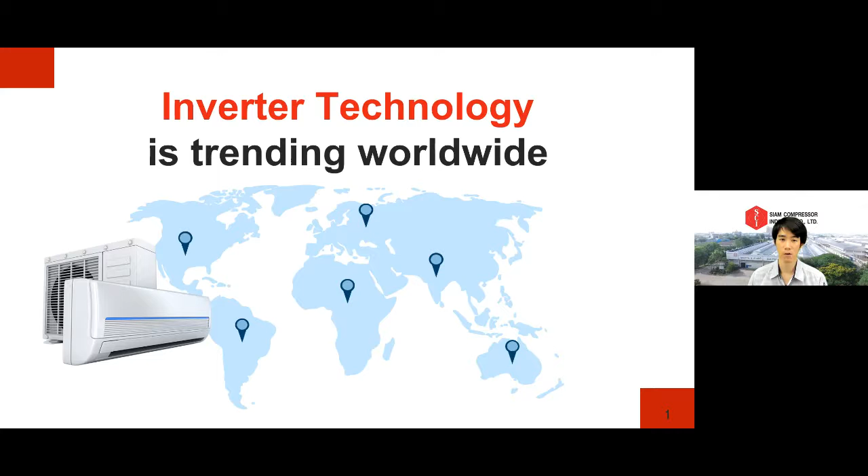So today I would like to share with you the benefit of Mitsubishi high pressure shell compressor that might be useful for your testing in the future. So let's start with this slide. Mitsubishi, we have supplied our compressor to many countries around the world, not only in Asia, but also in Europe and USA or Canada. There is a lot of interest in inverter technology because now inverter technology is trending worldwide. We have supplied our product not only in cooling application, but also in heating application and industrial application also. So I would like to say that Mitsubishi, we have a lot of experience in various types of product that could support you.

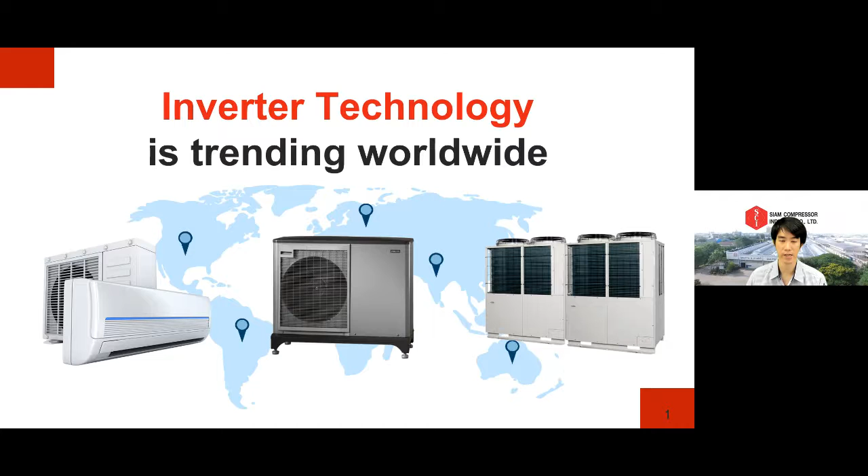I believe the main goal for the unit maker is to get the best efficiency and the best reliability for the customer. And in order to get better efficiency, I believe inverter technology is your answer nowadays because we all know well that inverter technology has a lot of benefits, like you could get better efficiency at part load condition and also less power consumption compared with the fixed speed solution. And in terms of better reliability, I would like to give you the benefit that you could get from using our high pressure shell compressor, that you could get better reliability for your system also.

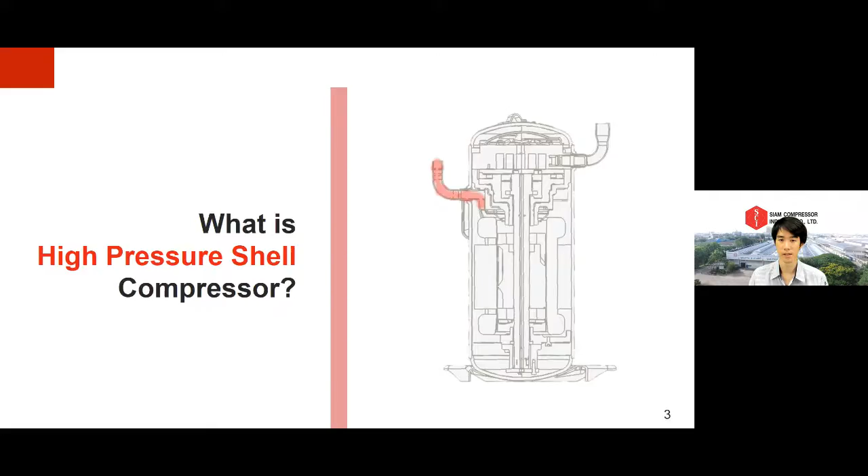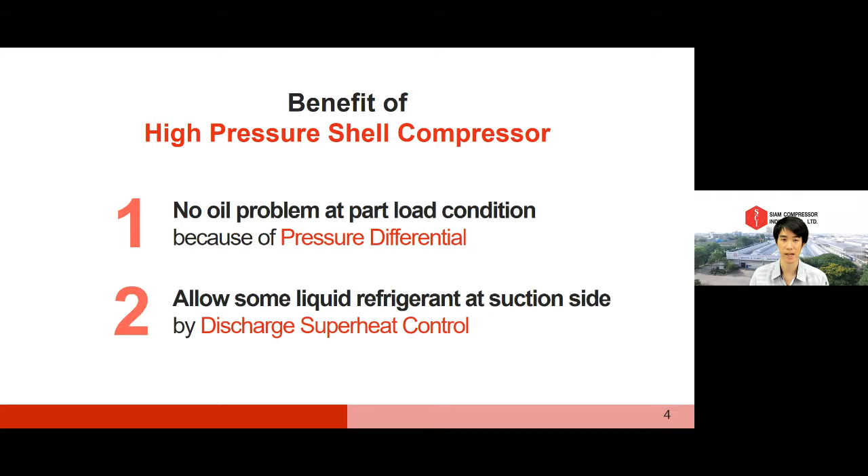So with this design, the pressure inside our compressor is very high. Also, the temperature is high also. And there are two main benefits that you could get from this design, a high pressure shell compressor. The first one is you could reduce the oil problem at part load condition because in our product, we use the pressure differential in order to supply oil for the internal part. And the second benefit is we could allow some liquid refrigerant that could go into the suction side by using discharge superheat control. So I will explain in the next slide the detail of these two benefits.

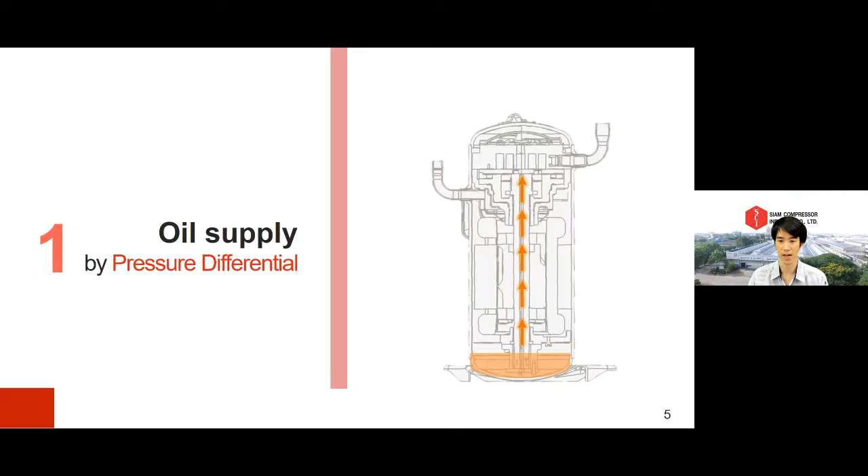Start with the first benefit, the oil supply by using pressure differential. So the concept is because at the top of the compressor and at the bottom of the compressor, there is a pressure difference. So we use this method in order to supply the oil from the bottom to the top of the compressor. Like this orange arrow in the presentation, it shows you the oil path from the bottom to the top of the compressor. And if you still worry about this concept, we also did many confirmation tests at severe conditions, for example, high load condition, high compression ratio condition, or high temperature condition, not only inside the operating envelope, but we also test outside the envelope to ensure that with our product, there will be no problem with the oil supply using the differential pressure concept.

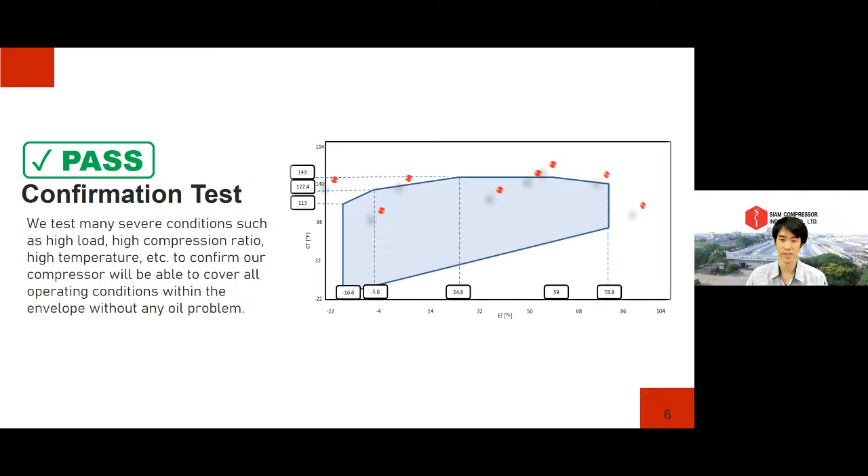And this slide shows you an example of how easy it is to use our compressor. Thanks to the benefit from pressure differential, our compressor doesn't have the oil pump inside the compressor. So we don't need to boost up the speed, which means you can play with the speed.

For example, this is one of our scroll compressors. There are two main areas, area 1 and area 2. For area number 2, which is the main area, you can play with the speed from 15 to 120, which is the maximum speed, without any restriction, just controlling the discharge temperature so it is not higher than our limitation.

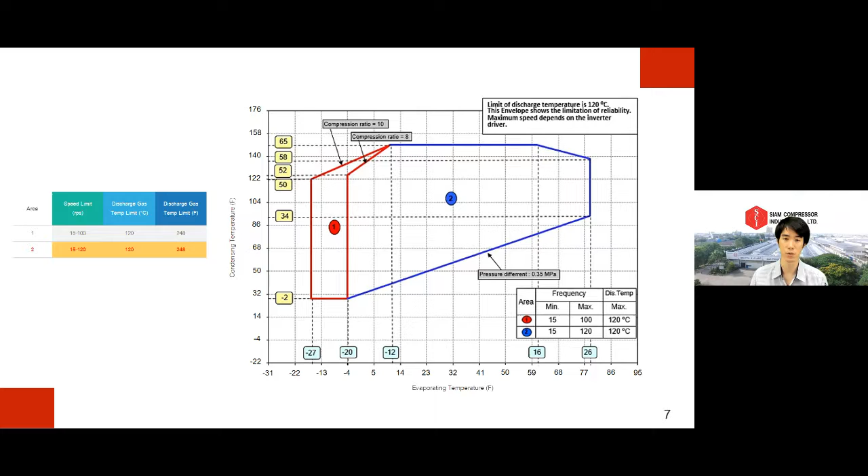For this model, the max discharge temperature limitation is 248 degrees Fahrenheit. So you just control this number, that's all. So it's very easy to use and easy to control our inverter scroll compressor.

Besides, our internal parts, like the compression chamber, have a special coating that can manage the liquid refrigerant also. So that is the benefit you receive by using our compressor. And with this concept we can use the benefit from liquid refrigerant, like oil return by the oil washing method. The main concept is we adjust the discharge superheat in order to get liquid refrigerant to bring the oil back in the liquid state.

And by using this method, there is no need to boost up the speed in order to return the oil, so there is no effect on the capacity of the unit and the efficiency of the unit, because we don't have to change the speed. That is the main benefit you get from the design of the high pressure shell compressor.

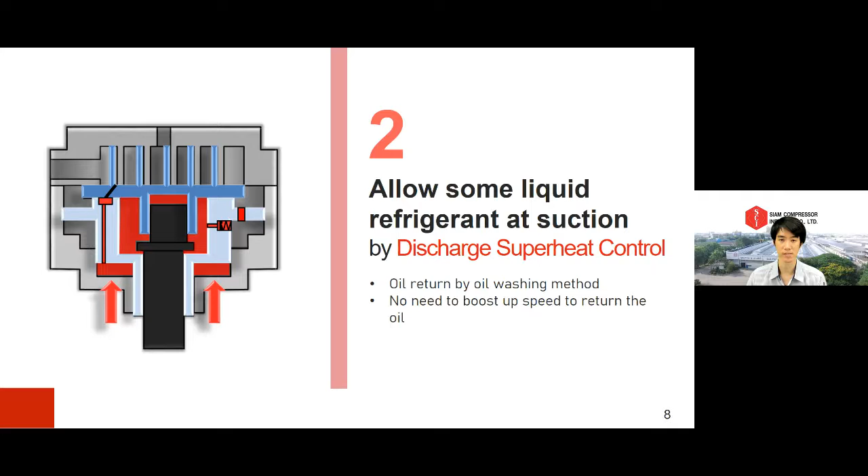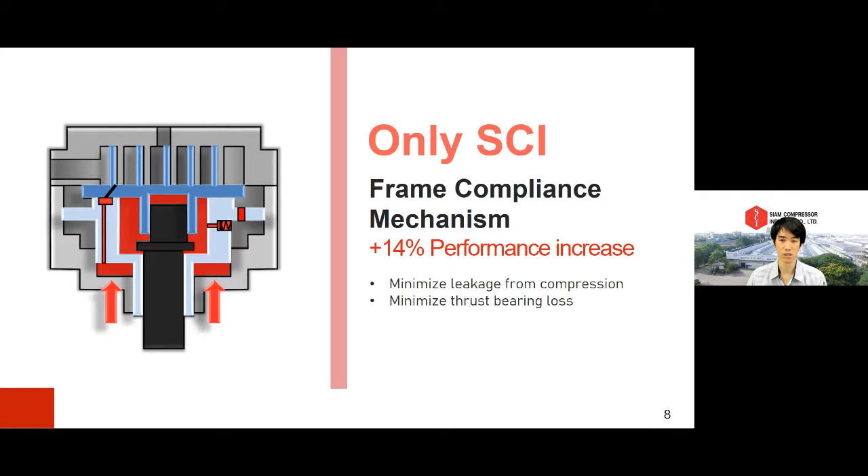And only available with Mitsubishi compressors, we have a frame compliance mechanism, which is Mitsubishi patented technology. From the actual test results, we could increase the performance by about 14% compared with the conventional design. With this technology we optimize the pressure chamber inside the compliance frame in order to minimize two losses. The first one is the leakage from compression, and the second one is the thrust bearing loss. That's why we could increase our performance a lot, about 14%. And we have put this technology in all of our scroll compressors.

We also did confirmation tests like liquid starting testing. This diagram shows you how we perform the test. We have a liquid refrigerant tank connected with a solenoid valve at the suction side of the compressor. We open the valve and allow the liquid to go to the suction side, and we do the test with our compressor. After that, we have a teardown analysis to check the internal parts.

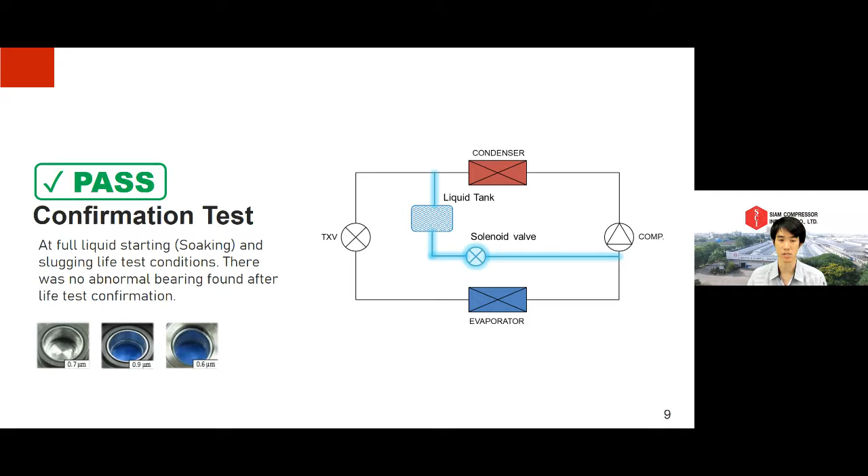You can see from the picture below that, in conclusion, there is no abnormal bearing part after the test confirmation. So we can ensure that this concept works well with the high pressure shell compressor. And not only the two main benefits you get from using the high pressure shell compressor, we have a lot of technology that we put in our scroll. This slide shows you in summary what we put in our scroll.

The first one is the asymmetric scroll design, which we designed to reduce the loss from compression leak and increase the stability of the refrigerant flow, in order to increase the efficiency of the unit in the system. The second point is low oil circulation. We have an oil separation technology that we put inside our compressor.

We also enlarged the oil tank so we could reduce the oil circulation ratio, about 50% at startup and about 10% at steady state compared with conventional models. The third one is the new suction structure you can see on this compressor. We put the suction side at the top of the compressor so that we could increase the performance at high speed operation through a larger suction volume.

The next is relief valve technology, with which we optimize the compressor performance and efficiency when operating in the over-compression area. We also have a high efficiency motor, specially designed for our scroll, and we're also using a rare earth magnet, which is a high grade magnet, in order to make sure that the reliability of our motor is very high.

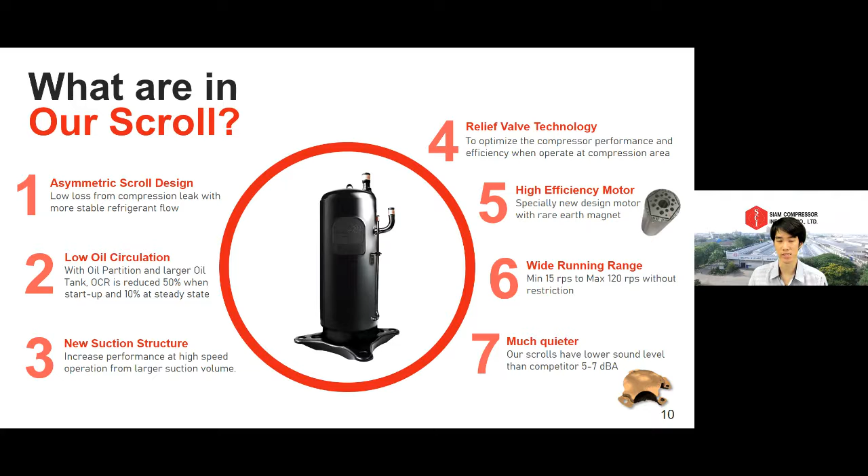And Mitsubishi, we never stop. This shows you our future plan. In the near future, we will have 3 new models that will increase the capacity of our lineup. We have 3 sizes: the first one is the ANB 100cc, BNK 110cc, and the last one is BNK 128cc. With the largest size, 128cc, you could go up to 23 tons in terms of capacity.

We have also put many new technologies in our new products, like vapor injection, a new internal structure, or very low speed operation, like 10 RPS, so customers can go lower than with our conventional model. It will also have high performance and low oil circulation.

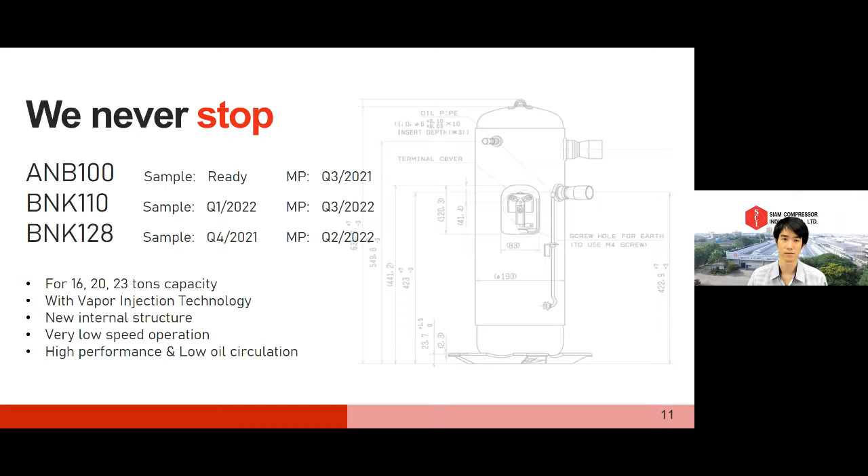And this slide shows you our total lineup, including our future products. The smallest size we have right now is 0.5 tons. This is the DNB 22cc, and the biggest size at this moment is the ANB 87cc, which can go up to 15 tons. But in the future, as I said, with the BNK 128cc, it could go up to 23 tons.

And if you want to use our compressor in tandem, we have an option to do a tandem configuration as well. For example, with 128cc, you could connect 4 units in one circuit, so you could reach about 94 tons in terms of capacity when our BNK 128 is available.

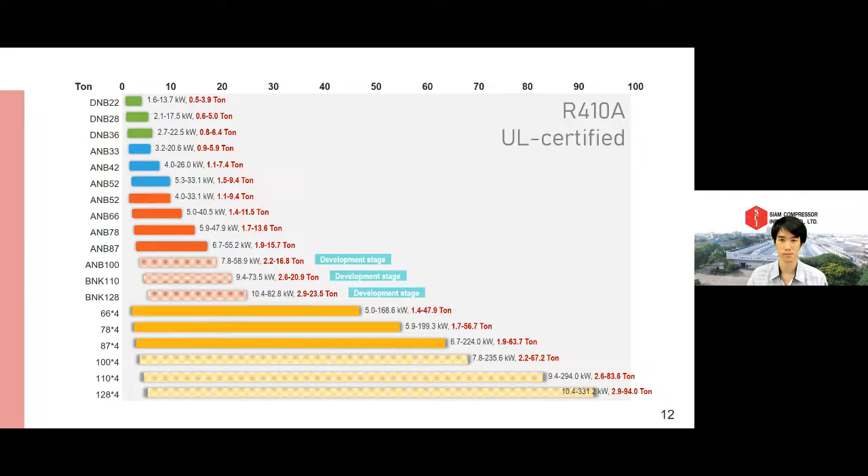And for customers who use our product in low ambient temperature, we also have a vapor injection lineup available for your unit or your system. One key technology is what we call the injection valve. This valve closes when the vapor injection feature is not in use, which means you can use our vapor injection model at low ambient temperature and at regular ambient temperature also.

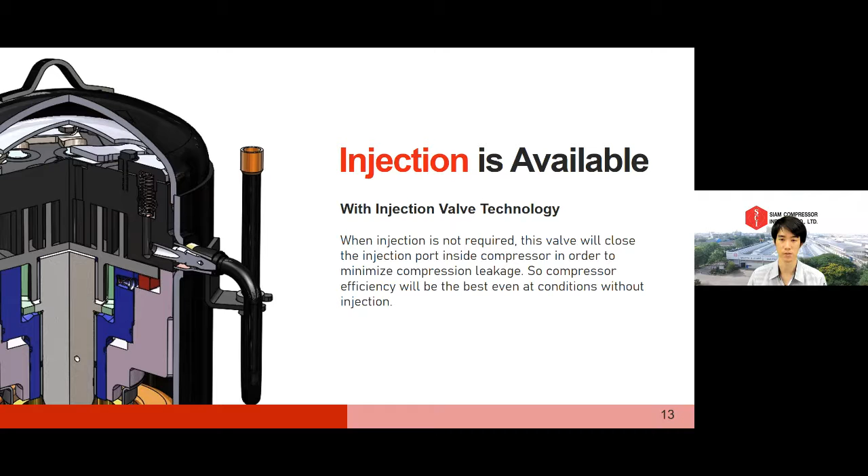And this is the last slide, about the future direction of Mitsubishi. This shows you the plan for alternative refrigerants that we are now working on. For high pressure refrigerant, right now we have R410A already in mass production. We also have R32 already in mass production, and we already supply it to some of our customers in Europe. In the future, we will have an R454B lineup available next year,

and for medium pressure refrigerant, we have R448A for refrigeration applications. The last one is low pressure refrigerant like propane, or R290. It is now in mass production and already supplied to the market. And this year we plan to launch R513A for chiller and air dryer applications also.

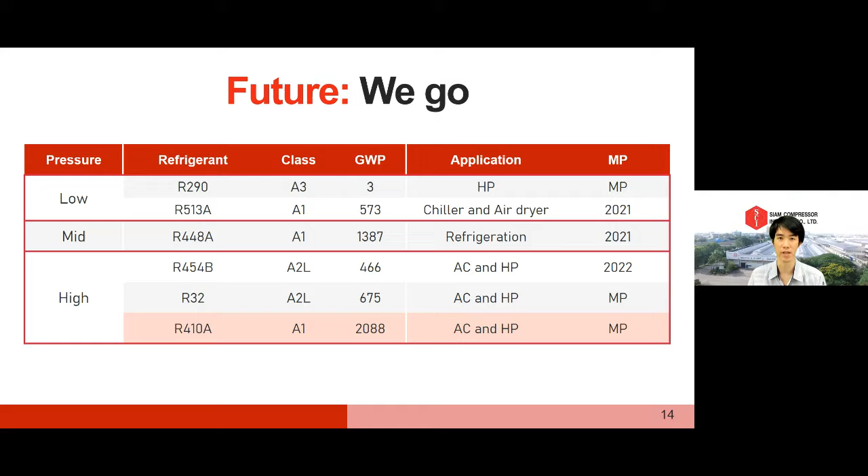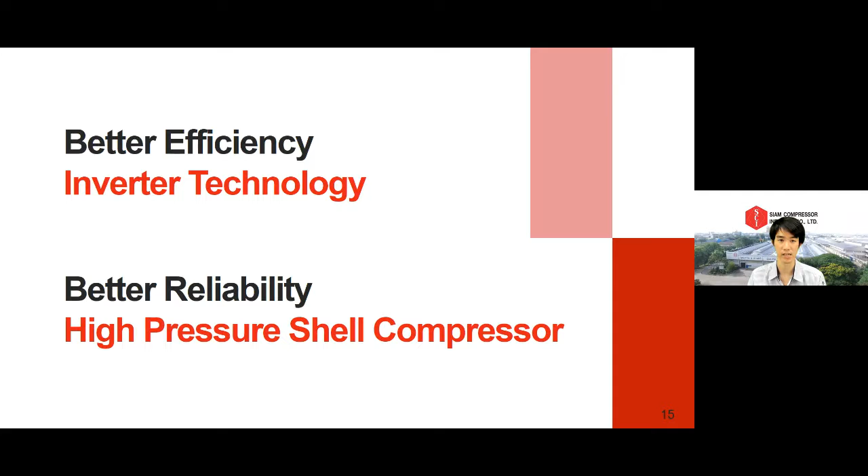Back to my first slide: for better efficiency, we know that inverter technology might be an answer, and for better reliability, I would like you to try our high pressure shell compressor. There are a lot of benefits we could provide, as I explained during my presentation.